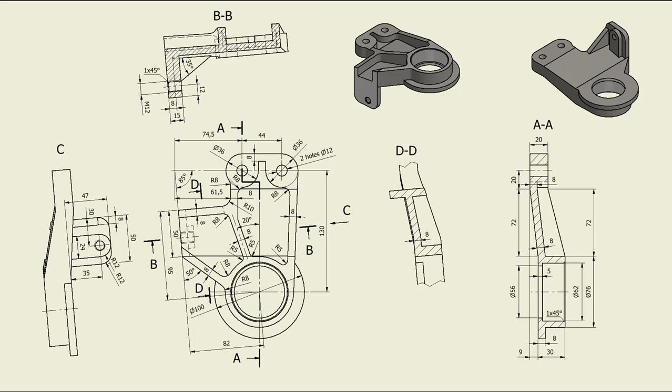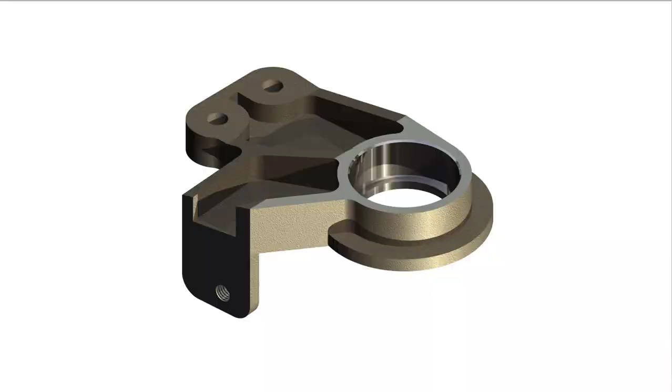Hi my friends, let's model the part number 95, SPUR plate, from my collection of 100 parts. The picture shows something. The part is partially similar to part 063, but the differences are pretty important. You can compare them. You remember this. The problems are with a lot of details here, but we now have a lot of experience to make everything in good condition. Let's start.

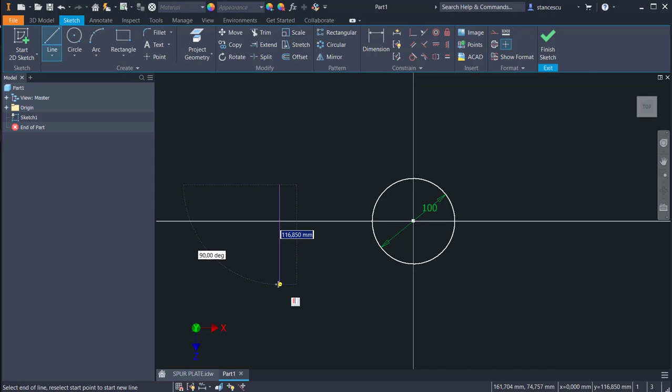A circle with a diameter of 100, and some lines. One is placed somewhere here, vertical, and then some other.

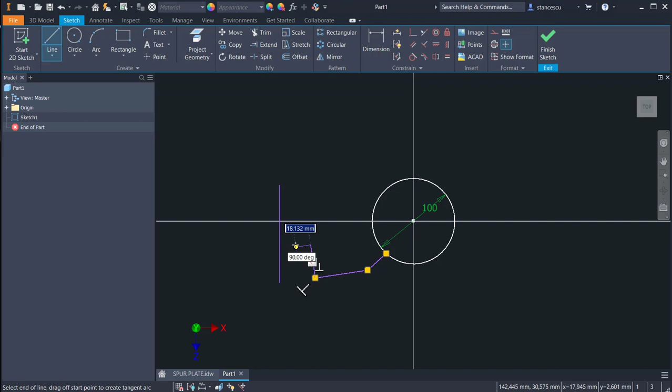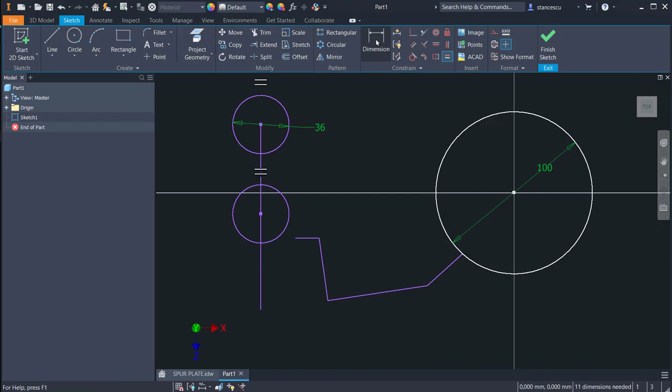A circle at the end with the diameter 36, another somewhere here with the same diameter. The distance between them is 44. And the distance to the end is 74.5. This line is a construction line. Okay.

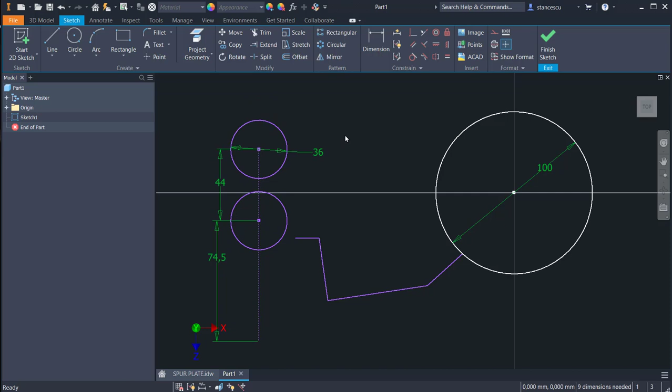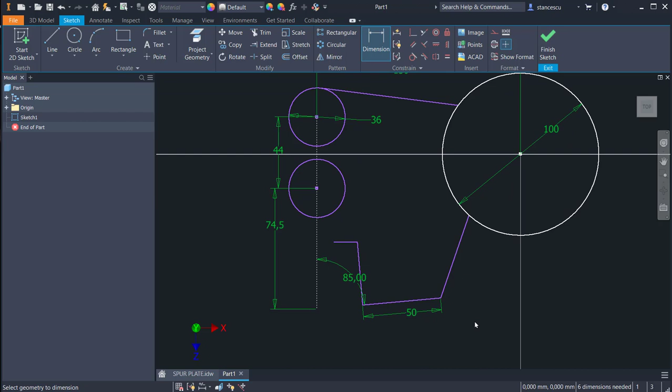Position this line from this to the circle. Distance between the circle and this line is 130. This line is collinear with this point. These two are perpendicular. The angle between these two is 85 degrees. The length of this is 50, and the distance from this line to the center is 95.

The distance of this is 61.5. All the dimensions are in the drawing, of course, and you can consult the drawing. Okay. Now another angle is 50 degrees, and this distance to the center is 82. It seems to be almost right, all of them. Trim.

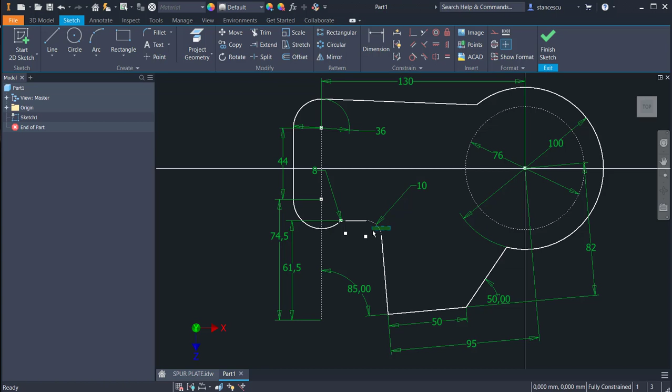A reference circle concentric with this has 76 diameter, and this line is tangent to the reference circle. Again, trim and some fillets. Radius 8 is here, and radius 10 is the next. This is not beautiful, but we can change it very easily. No other fillets and fully constrained.

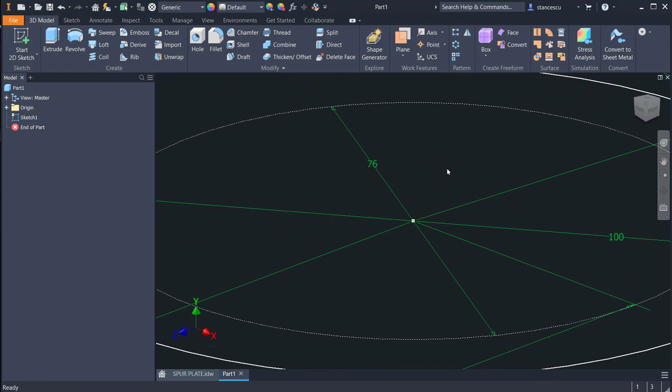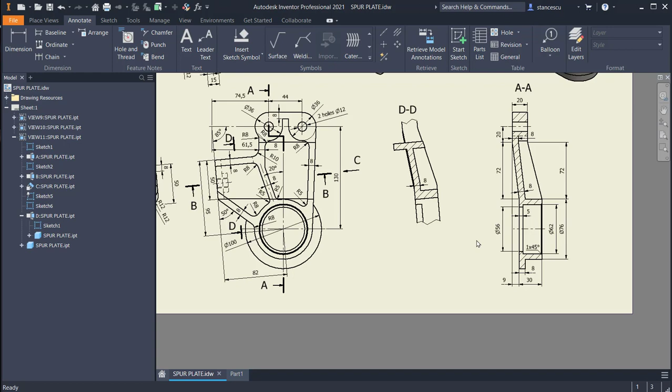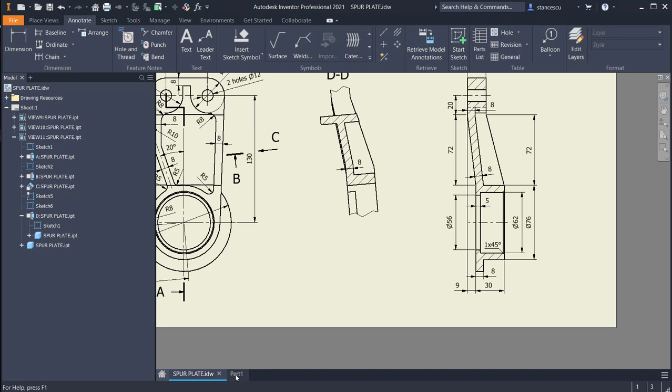Finish sketch, F6, and now let's take a look at the drawing. You can see here we drew all this external contour without these pockets, and now I want to extrude it 30 in this direction and 9 in this direction. This is to be the plane where we made this sketch. Let's do this. Extrude, asymmetric. This is 30, and down is 9. F6.

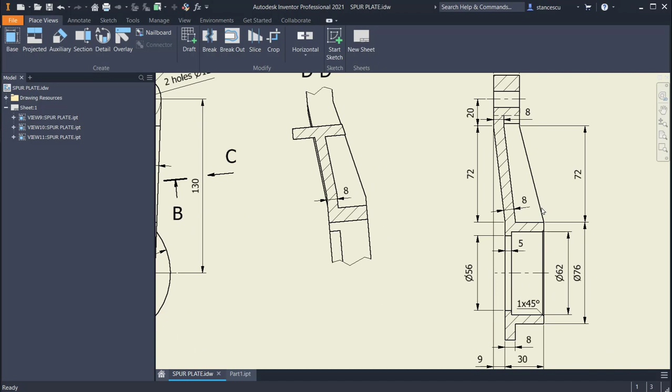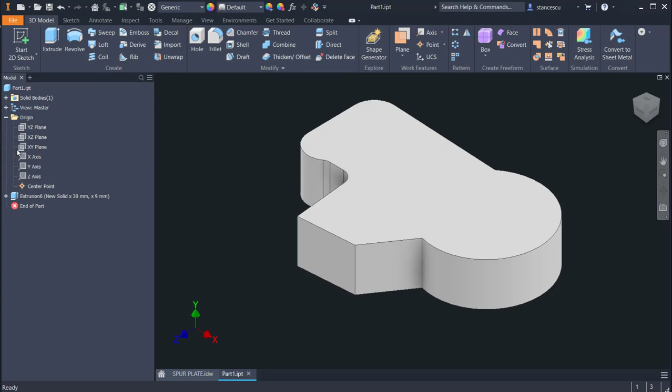Now we create this contour, you see, with the thickness 8 all over, from one end to the other of the part, and will intersect this profile with the actual volume. Dimensions are 8, 72, this slope line, and the distance from here is half of 100 plus 130 minus 20 minus this 72. Let's do it. The plane is XY. F7.

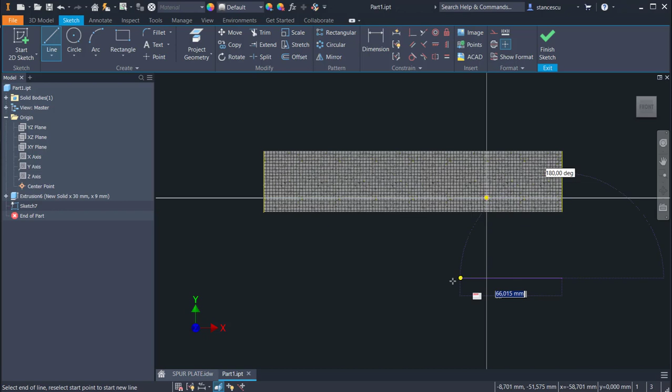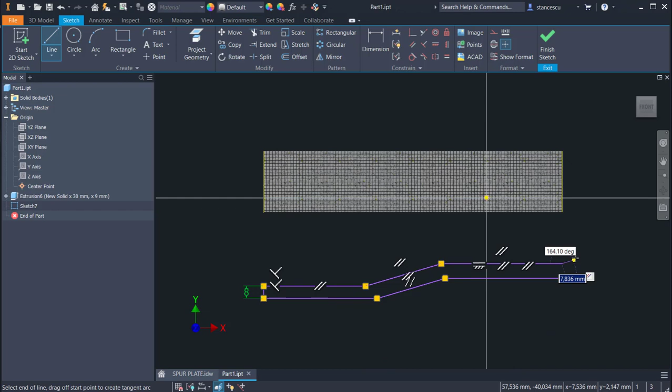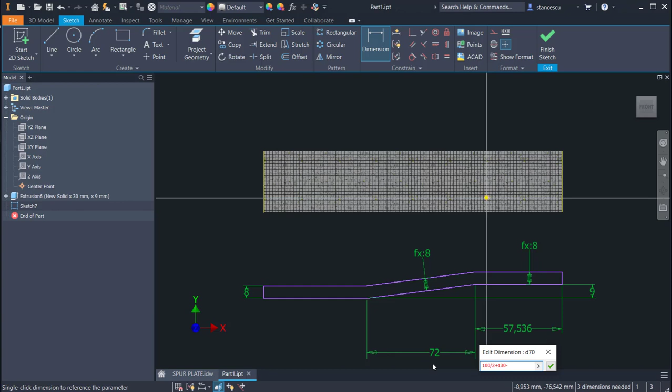I project these two ends, and I draw what you saw. Eight. This is 8 for sure. This is parallel, and then we go here and close. Dimensions, this is 9, and these two are 8. Copied from here, and also this. Good. This is 72. This is, as I said, 100 divided by 2 plus 130 minus 20 minus this 72.

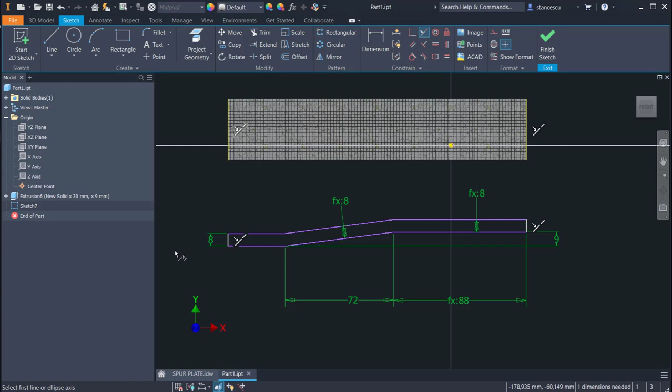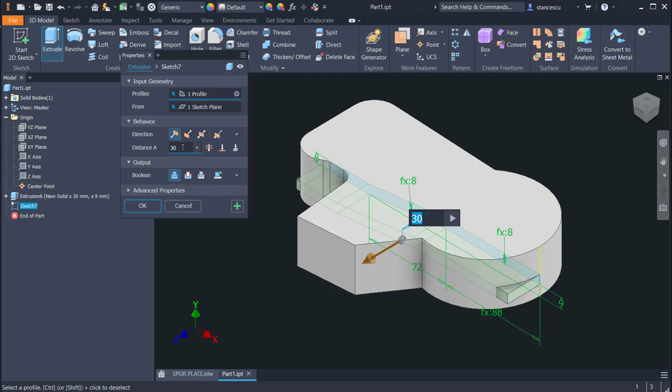Good. Now we make collinear this line with this line and this one with this one. Now we move all of this up, as you can see. Finish sketch, extrude that profile all the way in both directions, and intersection. Okay, this is the result.

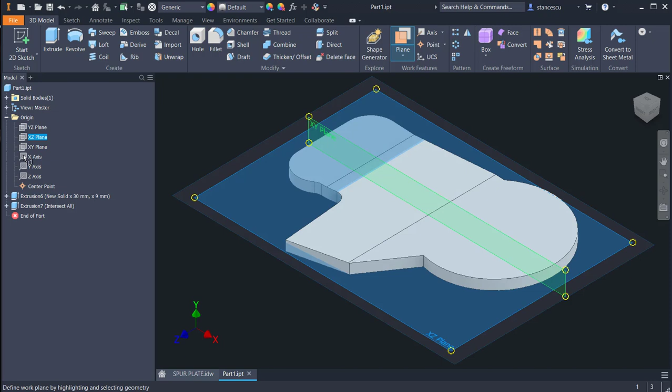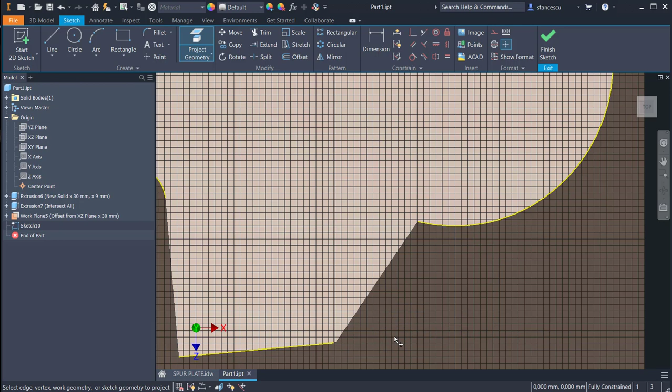We continue by creating a plane at 30 from the center point, and then in that plane we draw all this contour with the pockets, taking dimensions from here, and we extrude that profile to the part. Let's do this. First, a plane parallel with this one up at 30 millimeters. Then a sketch in this plane, where we project the majority of this contour, taking care of details like this one. Part of them must be construction, like this, construction lines.

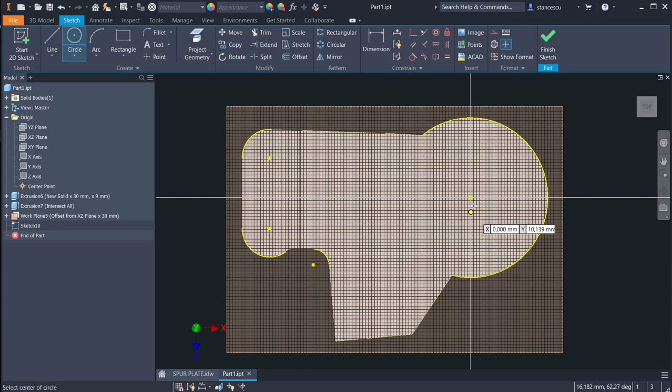Now I draw a circle, a line from this point to somewhere, making these two collinear, and the circle tangent with the line. You remember the reference circle in the first sketch. Trim, then other lines, this one to the circle, this from the circle, from here, restart, another one is here.

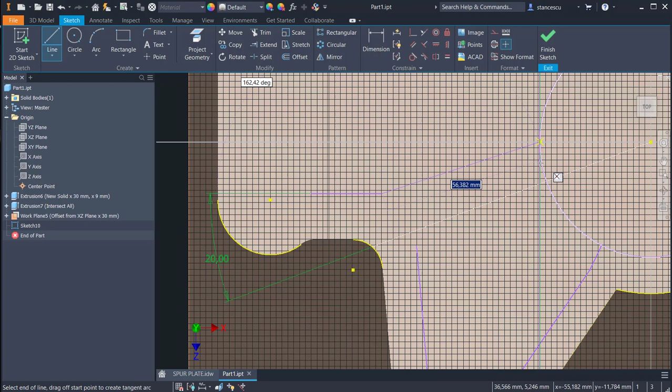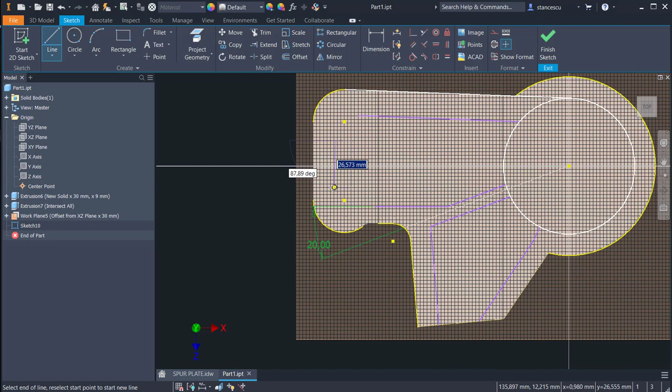A special line is from the center to somewhere on this arc, because it is the middle of a wall. The angle of this line is 20 degrees, and we draw two other lines from this end to the circle here, and from the circle to this point. They are parallel, as you can see, this is a little up. Let's verify if they are parallel. Okay, they are. Another line is somewhere here, vertical or parallel with this one. Good.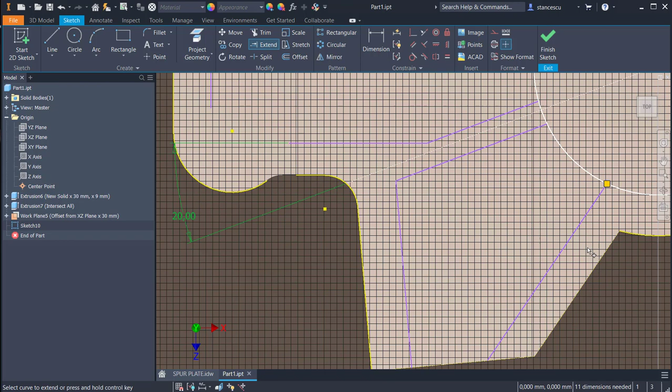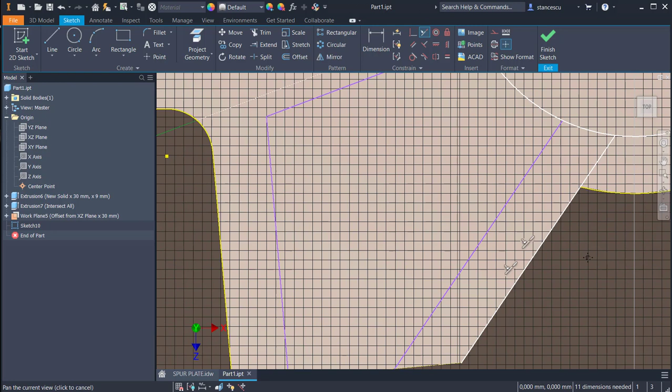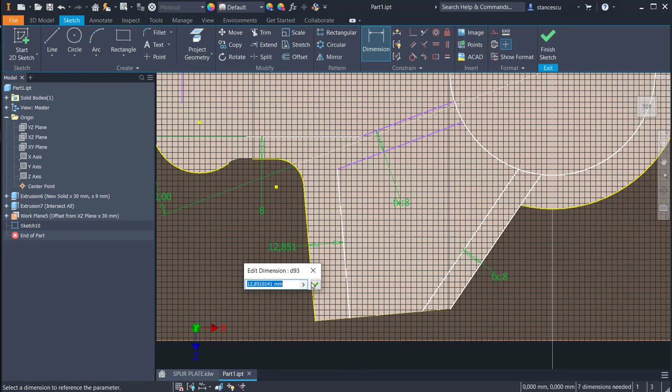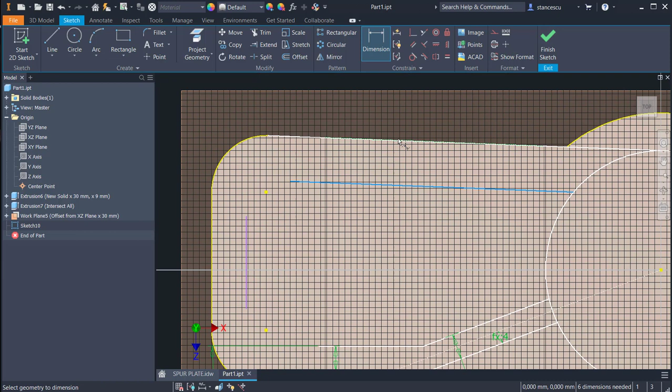Okay. Here is not a line but two lines. Extend to the circle. Another line is this one from this point, not this point, to the circle. It is collinear with this. Okay. Now all of them have the distance of 8. 8. Here, taken from the first. 8 is this. 8 is also this wall. Here is half of that dimension, dimension divided by 2. And this is also 8. Also 8.

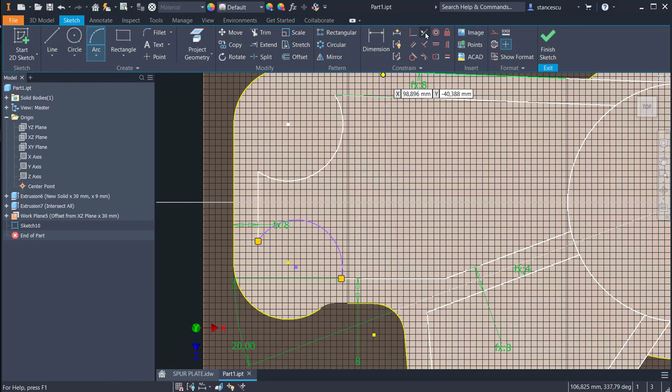Okay. Now I draw two arcs from end to end, with the center almost coincident with this, and the radius equal to the external. Same here, point to point, and the center to be near the other center, to apply this and to make them equal.

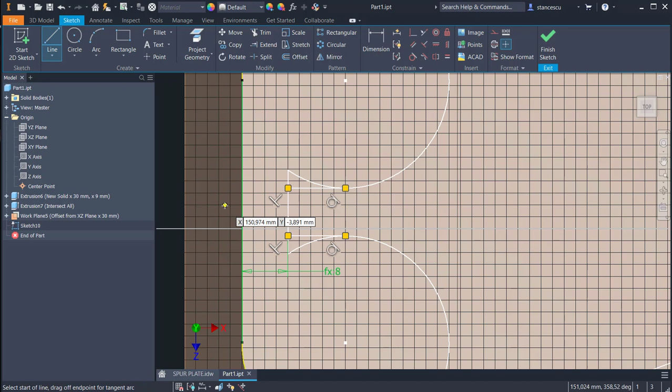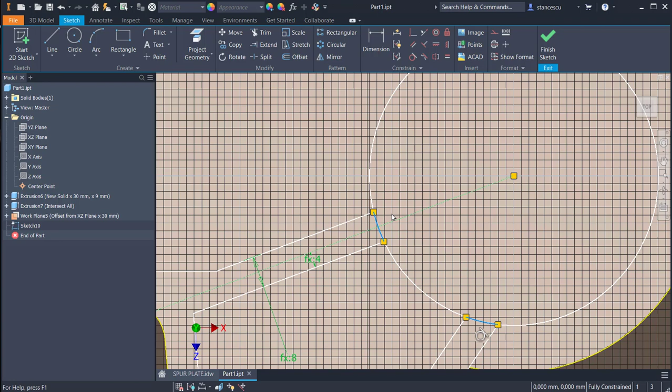Good. Here is a special construction from this quadrant to this line, from this quadrant to this line. Tangent and perpendicular. It's enough to be sure that they are okay. Good. Now we apply a split to create this segmentation of the circle in order to make this segment a construction line, like this. Good.

You see what I do, yes? This is the construction. This is not useful, so I make it a construction line. Let's draw these two: one is this, and the other is from end to end. Good. Let's try.

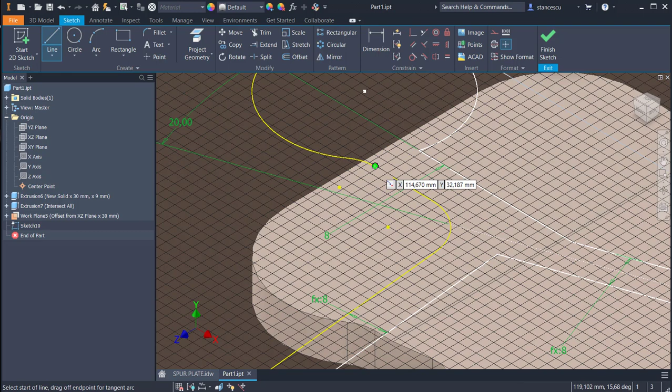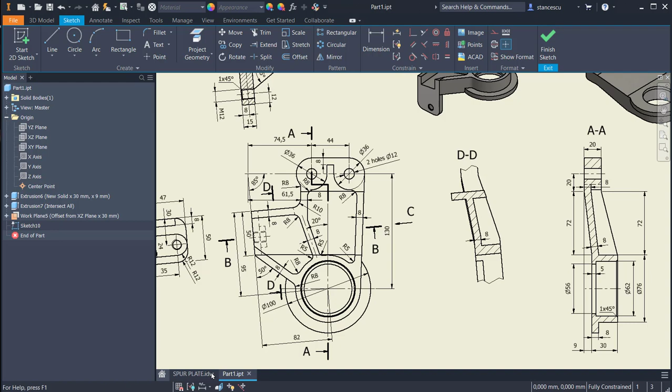Here is an arc. We project that arc, and we draw a connection line. This connection line. And I want to check if extrusion is possible now. Yes, it is. Cancel. The sketch is not finished. You see there are 5 fillets, and the rest 8 all over. Yes, 8 is a number for this part.

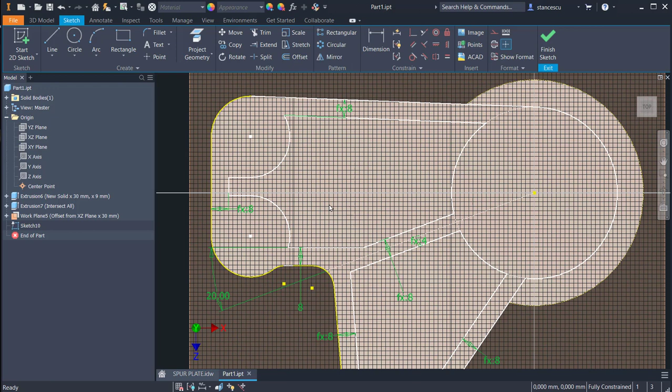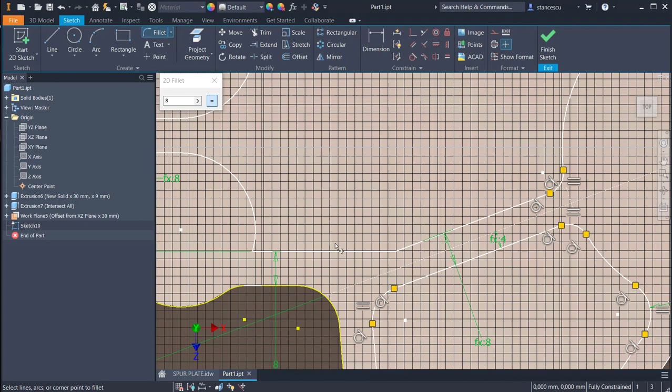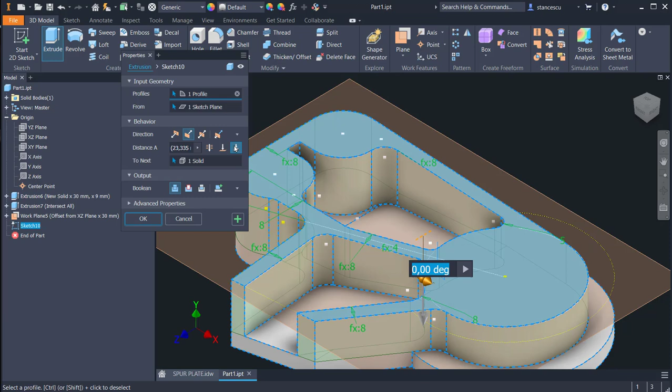Fillet 5 between this, 3 and then 8 all over. Okay, and finish sketch, extrude. This is to be extruded to the part. Okay, this plane must be invisible. Okay.

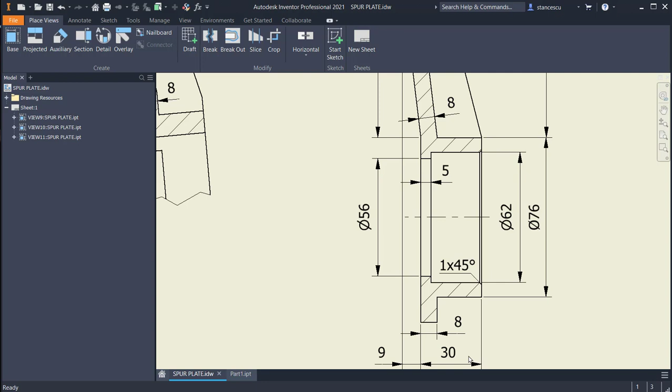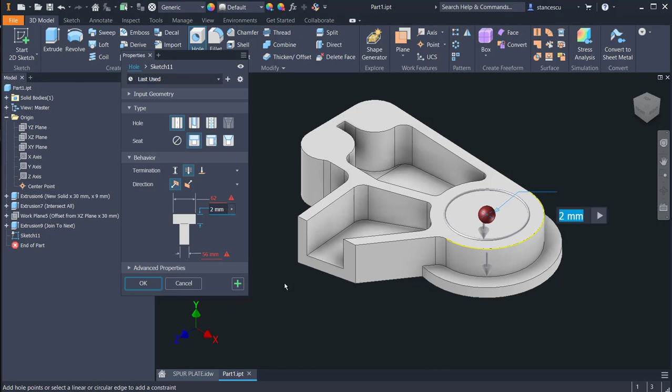Next, I want to create this hole as a counterbore. Dimensions are here: 56, 62, and 30 minus 5. Hole, counterbore, face, center, 56 already here, tab, all, 62, and 30 minus 5.

Okay, the other two holes are this one of 12 through. Simple hole, this face, this center, of 12, plus this face, this center, through. Okay.

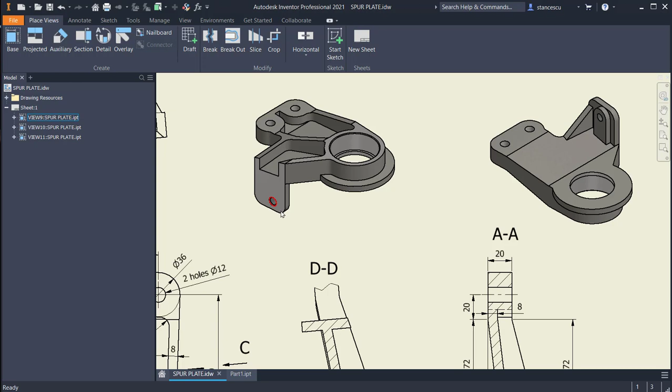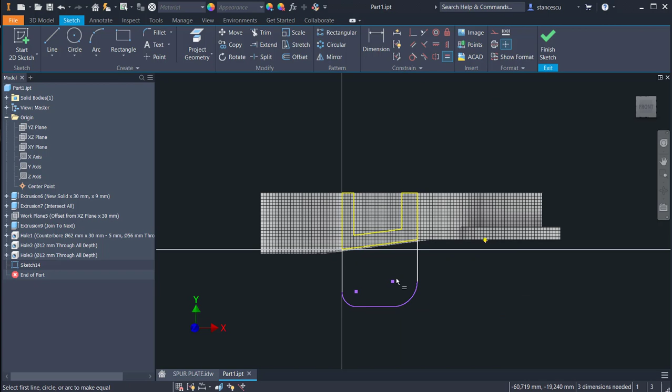We continue with creating this spur. Yes, this, which is on the side face, with dimensions 47, 50, and radius 12. For the beginning, this face, sketch, line from this point, arc, another arc to this corner. These two are equal, of 12. 12.

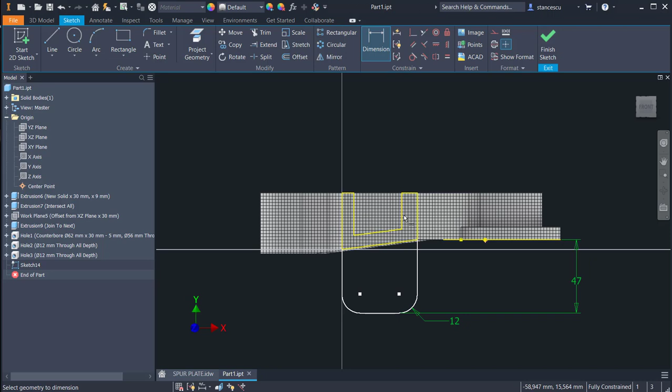This dimension is 47, as I said, to the center point. 47, and this is already applied from this. Finish sketch, extrude this contour in the other direction, on 8.

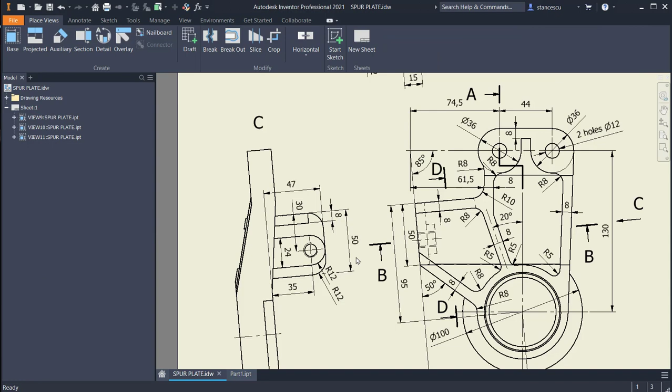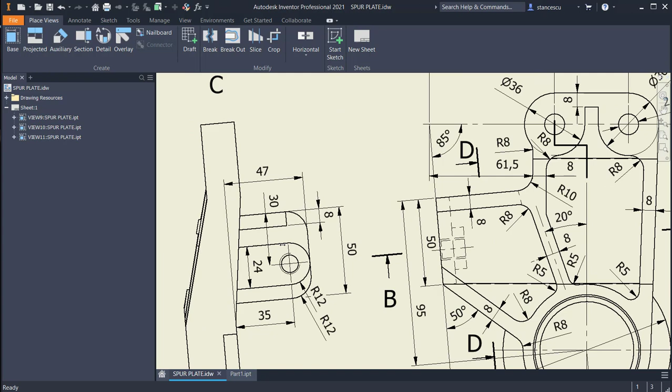The other added element is this feature, which is from 8 to 15. Yes, this is the added feature, this one, with dimensions 24, or radius 12, tangent here, because if you subtract 12 from 47 you find 35. The position is 30 from this end, 30.

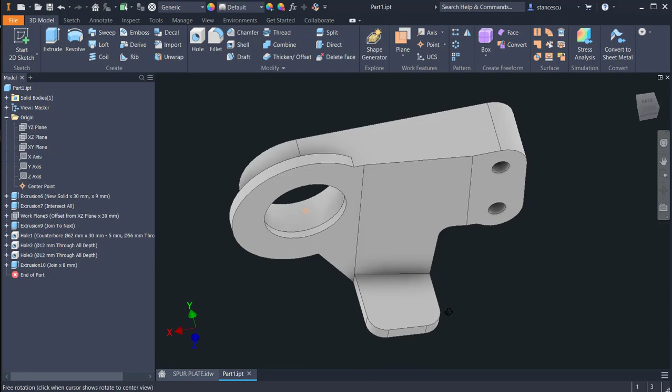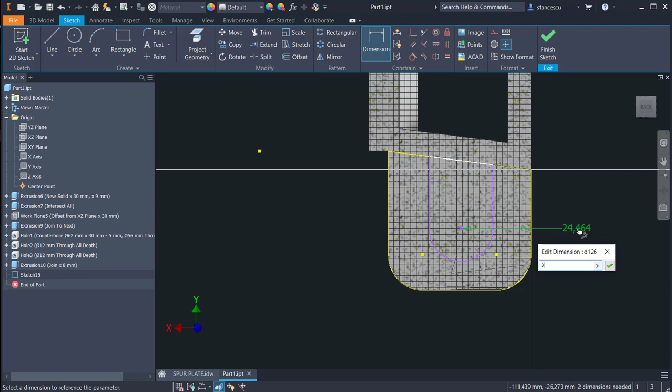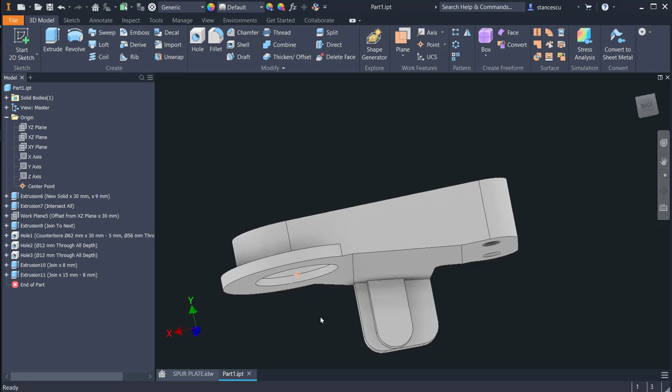Good. We create this on this face, F7, line from here, arc, and line, and closing. Why not? I don't see a tangent, see here. Let's apply. Good. 30 from here, radius 12, and tangent to this. Extrude this area 15 minus 8. Okay, correct.

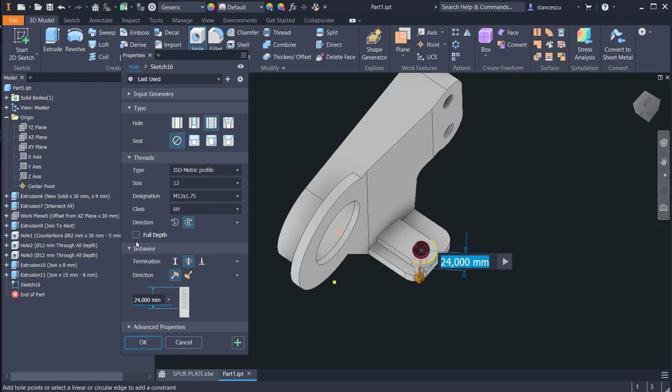It is a hole of metric 12 in the center of the last feature, and then a chamfer of 1 by 45. 1 by 45 is also here. Let's create the hole. Hole, this face, this center, threaded, metric 12. Okay, through, full depth. Okay, now chamfer of 1, and also here. Okay.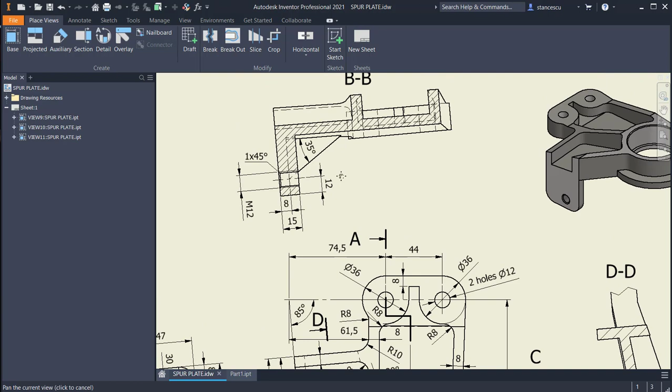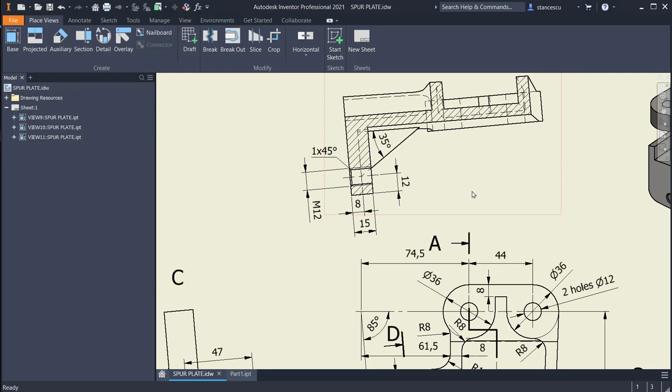Next is this rib with 35 degrees and the end on the center of the hole. Yes, the dimension is 12 for this end. Good. Remember how this is. 35 degrees is from this face. From this face.

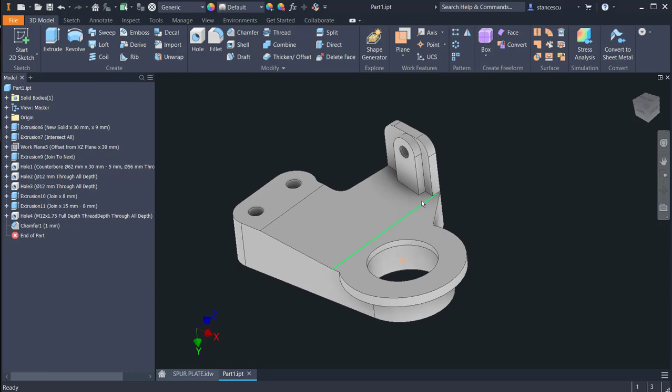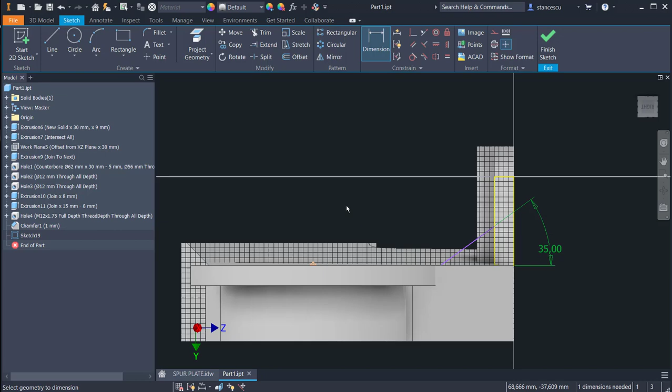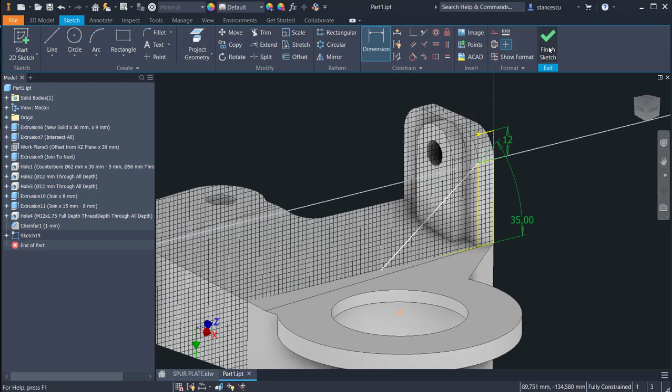I select this face. I draw a line. Angle of 35, and dimension from the top. I have to project this here in order to apply 12 here. Finish sketch, rib, this profile, this option, this direction, and 8. The thickness is 8.

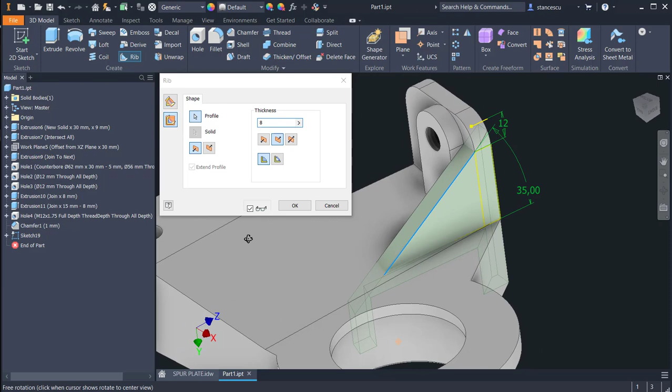This is what happens. You see, it goes to the end. Oh, but it must be here. Cancel. I change the reference for this, redefine this sketch to this face. Yes. And now I apply the same rib, this option, this direction, 8. Okay, now it's okay. Good.

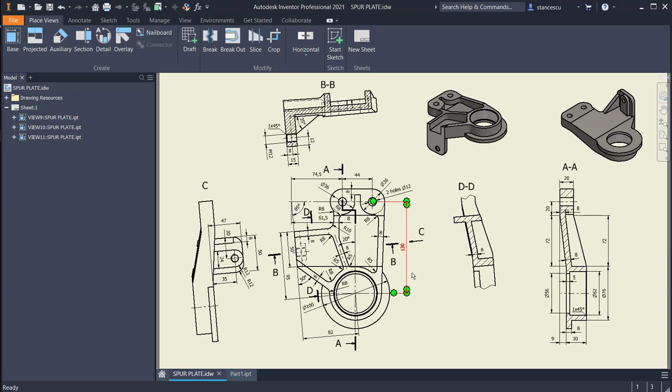F6. The last thing we have to do is to create a cut, an important cut. This is this one, 72, and remaining 20. We have to create this contour to cut from all over the part. Yes, these are edges due to that cut, you see.

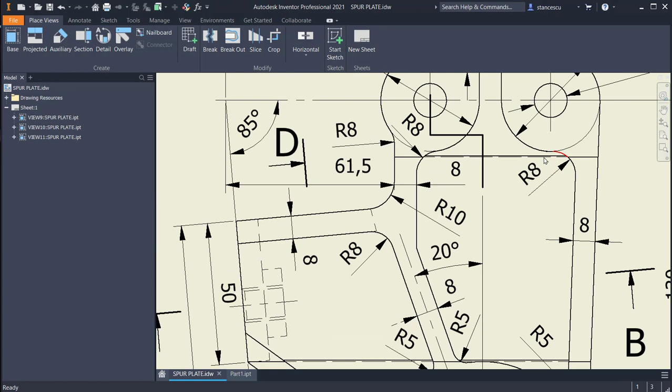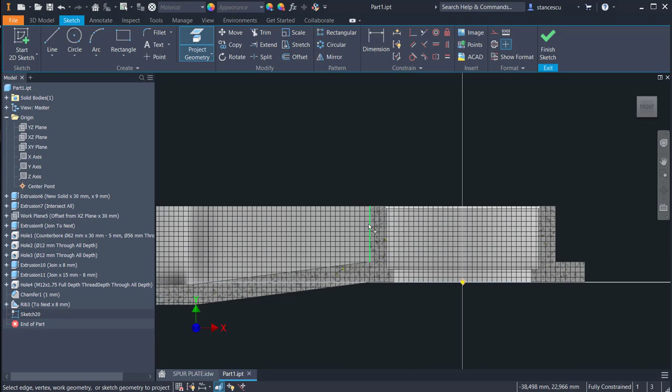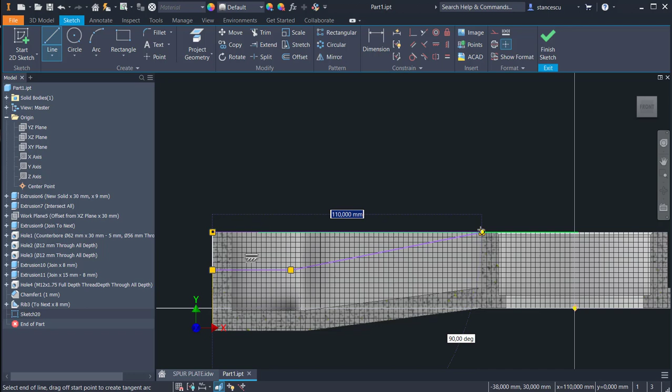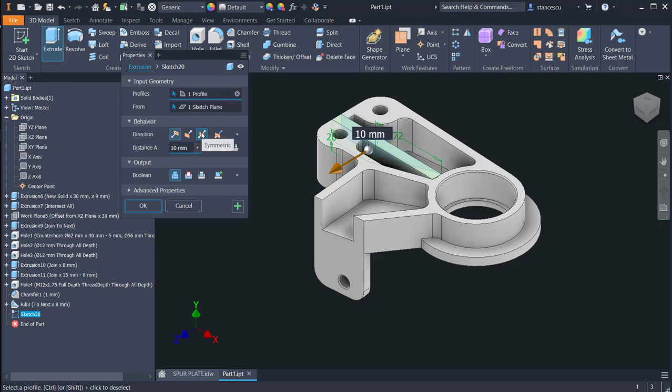Let's create. The plane is XY, F7. We project a line, a generator, which must be a construction line, and then we draw a line, another line, horizontal, a continuation to the top, and a closing line here. Dimensions 72 and remaining 20. Finish sketch, extrude, symmetrical, all the way, cut. Okay.

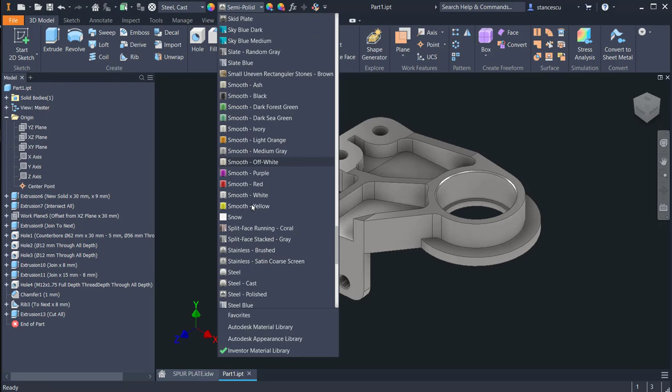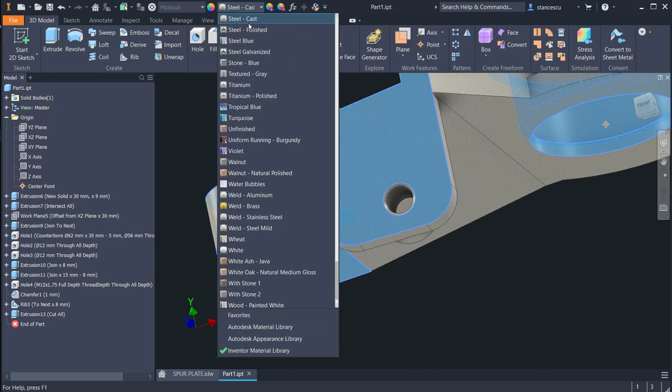This is all, my friends. We assign steel cast, general aspect steel cast, and some faces to be machined. This one and this, of course, to be polished. F6. What is the situation with iProperties? Update: 2 kilograms for this part.